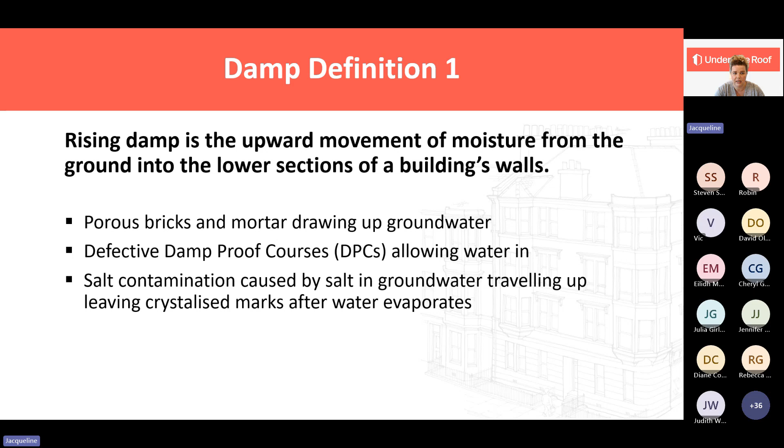It's not uncommon in ground floor flats to see salt marks on walls, and generally it does indicate that there are some other kind of issues going on below ground level that need to be dealt with, and that can cause rising damp.

Our other type of damp that we have in Scotland is penetrating damp, which is when water enters the property from the outside. Your most common causes of penetrating damp are things like roof and gutter issues. So that might be dependent on the type of roof that you've got, whether it's a flat roof, or a pitched roof with tiles, slates, whatever it may be.

It could be that there's a missing or a slipped slate, or there's issues with the lead work on your roof. Maybe your flat roof has come to the end of its life and it's started to bow. There's water pooling on it, which can obviously cause water to enter into the building. Gutter issues, we'll come on to talk about that in a wee minute. I've got some photographic examples so we can see where gutters cause people problems.

Cracked masonry is another area that can cause penetrating damp to occur in your property, particularly when, as an owner, you're just not aware of the condition of the stonework in your building. You have cracks there. When it's raining, the stone gets wet and the water just comes through and starts to cause some real problems. Cracks or just defects in windows and door surrounds can be an entry point for water that can start to cause damp. And obviously, if you've got any blocked or leaking drains, downpipes, externally or internally, then that can cause you issues with penetrating damp.

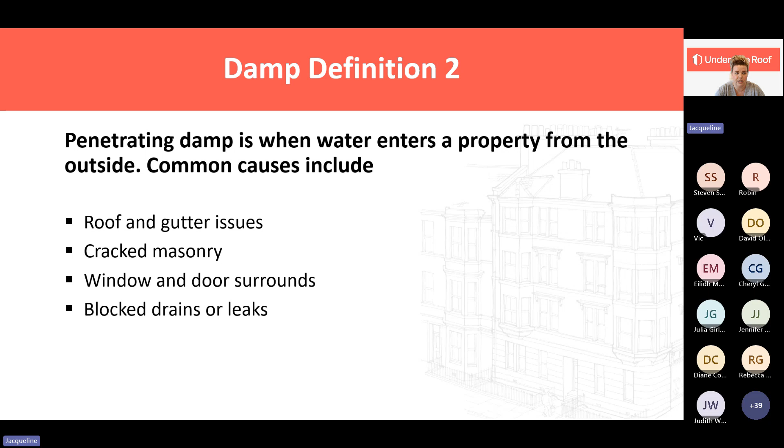Mould is a type of fungus that grows on surfaces in damp and humid conditions. We hear a lot in the news. It's been so topical for a number of years, but particularly in the last 6 to 12 months, where there's been lots of press activity across Scotland, towns, cities, smaller areas, about people who are having issues with black mould in their properties.

So typical causes of that is obviously excess water that's coming from leaking roofs, plumbing leaks, or water ingress that's coming into the property. It's got nowhere to go. It's causing damp, it's penetrating damp, and that is then turning into condensation in areas, and it's creating black mould. Poor ventilation prevents moisture from escaping in a property. It increases humidity, and that's a real breeding ground for mould to start growing.

Condensation occurs on cold surfaces. We'll come on to talk about condensation, but I think it's just important that we recognise that we've got humid air in a property and we've not got anywhere for that to go. When it does hit a cold surface, whether that's an external wall or a window or both, condensation and water droplets are going to occur. If they're not dried off, then you're going to start to get mould growth in those areas. And obviously, rising and penetrating damp can cause mould to grow as well.

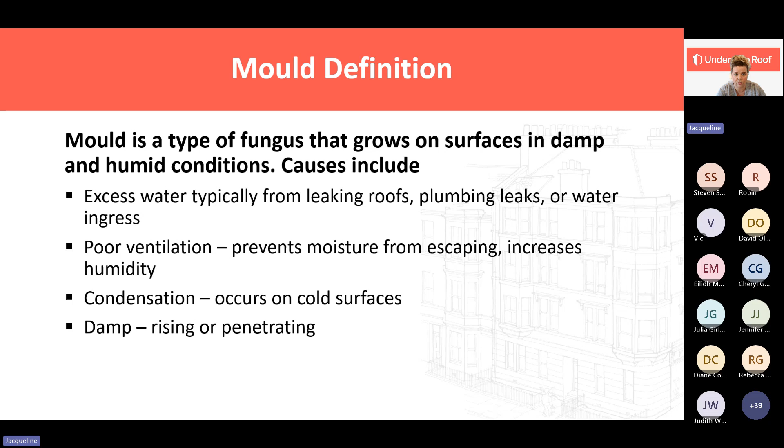So I just thought it would be useful to have a couple of photographic examples. I'm aware as landlords you're not all going to be living in the buildings where you own properties, you might have a letting agent who looks after your property or your portfolio. So you're not there on a regular basis. But I really would encourage you to visit your properties. And it's a good idea to start off with what's happening externally. Have a look at the building from the opposite side of the road, and have a look up at the gutters and see what's happening.

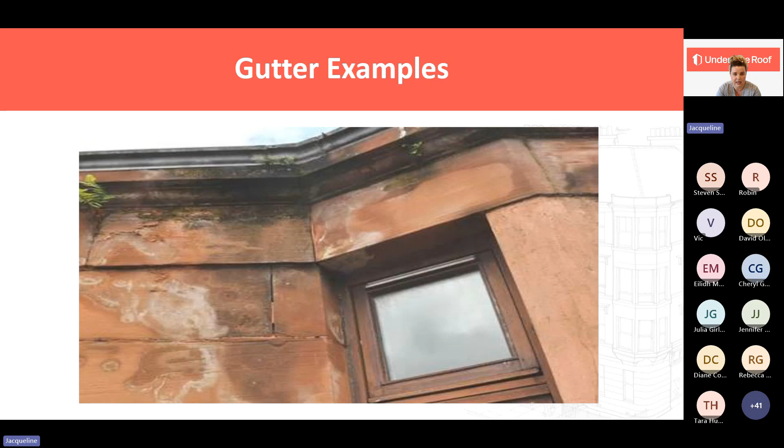We can see in the example here that we've got some foliage that's grown out of the gutters. We can see that the stone is really wet, and it's obvious that there's some kind of water leak coming from the gutters that's causing the foliage to grow and the stone to get wet. That will undoubtedly be causing issues internally. You can also see that there's some cracked masonry as well. So have a look up at your building, see what's happening. Do you see something like this?

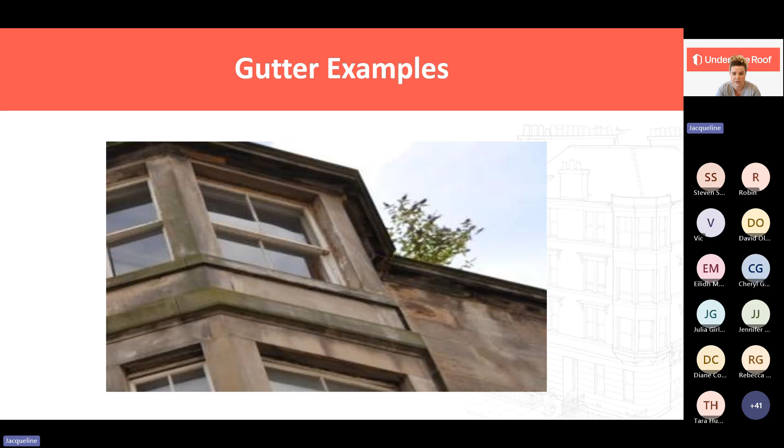Or do you regularly look out, whether it's in your own property or when you're at work, onto a tenement building, and you see this? That is undoubtedly going to cause an issue in that building, and the gutters do need to be cleaned on a regular basis. We would always recommend that they're done annually under one roof. In certain cases, it might be that they're done twice a year, but we have had examples from owners who are doing it on a quarterly basis just because of the location of their building in a leafy area, and they have regular issues with leaves blocking the gutters, and foliage growth.

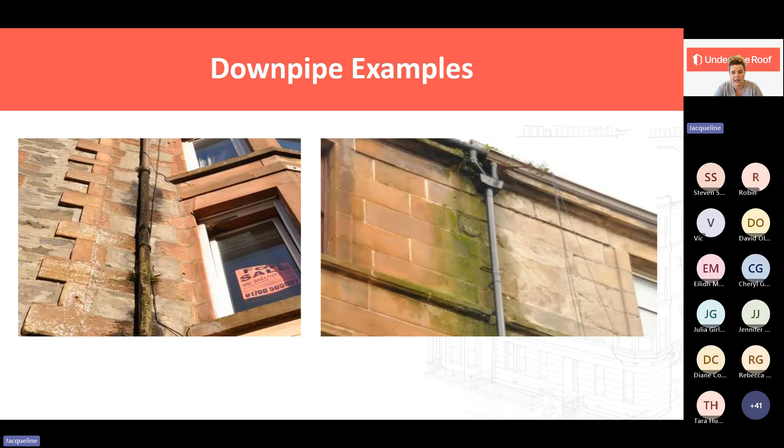We can see that there's issues there with water; rainwater is coming down the drain pipe, and leaking out and causing issues to the building. So have a wee look and see what's happening in your building next time you're round, or next time you're driving past, if it's somewhere that's local to you, just to get an idea of the condition, what's potentially going on, and how you can then start the process of speaking to the other owners and trying to figure out resolution.

So why is it important for you as a landlord, as a property owner, to maintain and look after your building? We speak about this continually at Under One Roof when we're talking to people about tenement management and maintenance. We need owners, landlords, to know specifically what your responsibilities are. Obviously, as a landlord, you've got a whole host of regulations, legislation and obligations that you have to comply with.

But don't forget that outwith you being a landlord, you're also an owner within a building, and you didn't just buy your flat, you also bought a share of the common areas, and you are responsible for the upkeep and the maintenance of those areas along with the other co-owners in the building.

We hear a lot at Under One Roof through our inquiry service that I'll come on to talk to you about later on, about difficulties that owners have contacting landlords, getting landlords to engage in the common repairs process, or just even getting them to engage in basic dialogue about the condition of the building, and issues that may be there. So I really would urge everybody that's here today to be aware of what your responsibilities are.

If you don't already have a copy of the title deeds for your property, then I would recommend that you go on to Registers of Scotland and you pay the £3.60 fee, and you download a copy of your title deed so you can check what your responsibilities are on an individual basis and in common with the other owners in your building. You need to be aware of the condition of the building.

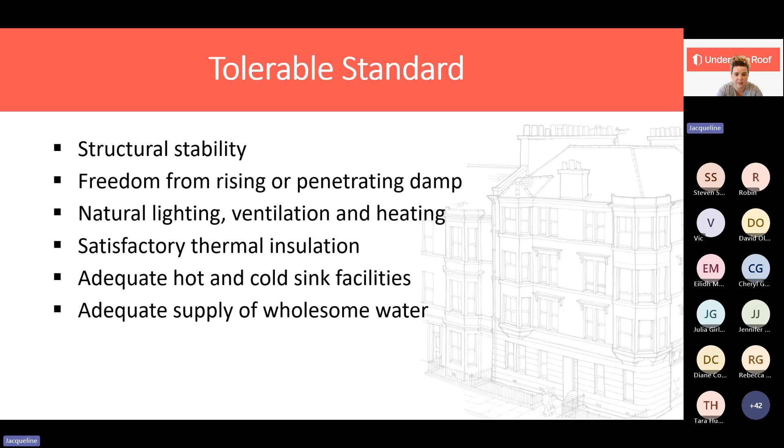It has to have natural lighting, ventilation and heating, satisfactory thermal insulation, adequate hot and cold sink facilities, adequate supply of wholesome water, sanitary conveniences within the house, satisfactory facilities for the preparation and cooking of food, effective systems for drainage and disposal of wastewater, adequate access to all external doors and outbuildings, and an adequate and safe electrical installation.

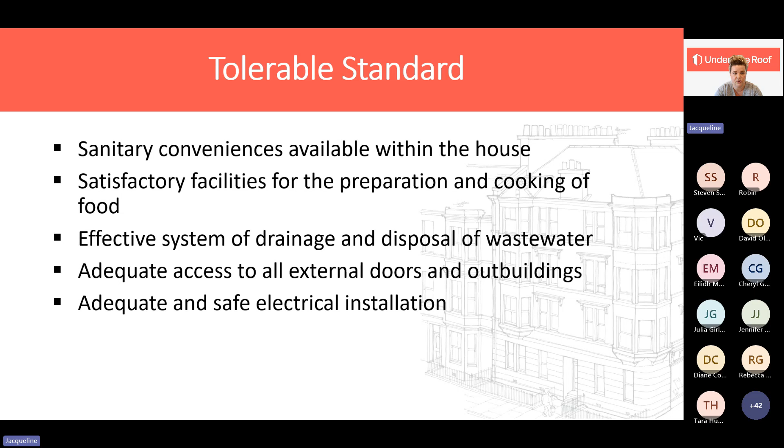So if we think about that in the context of the updated 2025 Act and where we're going with that, the Scottish Government will be outlining what their plans are within the tolerable standard for additional regulation upon landlords on how they have to deal with damp and mould in a property, what the timeframes are for that, and how we can start to move forward with updating our housing stock in Scotland. How are they going to do all of that? Well, they're going to do that through the vehicle of Awaab's law.

Awaab's law came into effect in England following the death of a toddler in 2020. He and his family lived in a social housing property that had issues with damp and black mould that caused him to develop severe health issues as a result of living in those circumstances, and he tragically didn't recover from it and lost his life.

So at Westminster, they took on Awaab's law and brought that into being, and that is what the Scottish Government is looking to do potentially from March next year. There's no update from them at this time as to the definite date, and there's certainly no update that they may not meet this date. The intention is, following the bill receiving royal assent and becoming an act in November, that from March next year the principles of Awaab's law will come into the private rented sector as well as the social housing sector in Scotland.

So what will that mean for you as a landlord? It will mean that you'll have a legal obligation to investigate and resolve complaints about damp and mould, and it means that you'll have strict timeframes to comply with in the repairs process. If we look at Awaab's Law as it stands at the moment for England, which you can go online and have a look at, you'll see that there are different categories of repairing issues.

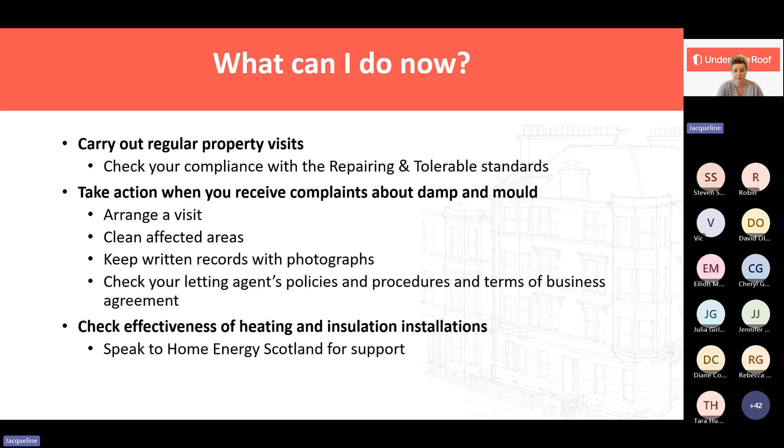So have a chat with them if you're thinking, my heating system is not that effective, it's been there for a long time, I want to explore what my options are. So speak to Home Energy Scotland. Make sure that your heating systems are regularly serviced and radiators are being bled. Make sure that your tenants have got a key to bleed radiators and instructions on how to do this.

Why are we bleeding radiators? Well, we don't want radiators to not be able to operate fully and effectively. When the heating goes on, we want the full radiator to heat up and to be at optimum performance. If it's clogged up and it's not bled, then the radiator may not come on fully, or it may not come on at all. So make sure that the tenants know what to do in those circumstances.

Or it might be that when you go round, when you're checking your compliance with the repairing standard and doing that visit, you take a key with you to bleed the radiators, and you just say to the tenants, make sure that the heating's off when I come round so that I can bleed the radiators. Provide tenants with a copy of any safety check certificates and service paperwork that you've got.

Even if your letting agent is carrying that out, make sure that your letting agent is giving the tenants a copy of it, as well as yourselves, just so that people know that all the safety checks are up to date for the property. Have a look at the ventilation within your property. Make sure that all your windows open properly.

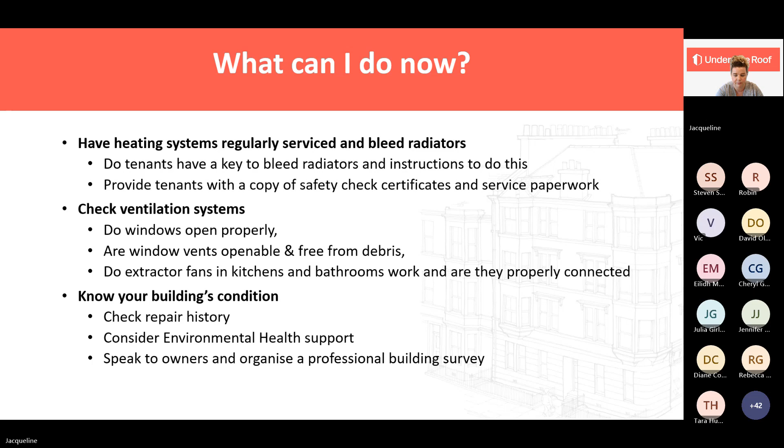So what are our top tips for tenement owners when it comes to just generally being an owner and being a landlord in a property, whether you've got issues with damp and mold or not? We want you to know who all of the owners are in a building. So get to know the owners. Make an effort to find out who they are, get their contact details, and make sure that that's circulated amongst all owners so they know how to get in touch with you, particularly as landlords.

And if you're working with a letting agent and you want the communication to go through the letting agent, then make sure that people know how they get in touch with you. You know, we're not anonymous. We've got to work together with owners. And as we move forward with this legislative update and Awaab's Law coming into effect in Scotland, a lot of the issues that we have seen in properties and that we're going to see in properties are not just all attributed to tenants' lifestyles.

We know that our housing stock is in poor condition in Scotland. We know that that is contributing to water ingress, which in turn is going to create damp, and mold is going to develop, and we need to be able to move forward to start repair work. So the first step for that is knowing who the other owners are and being in touch with each other.

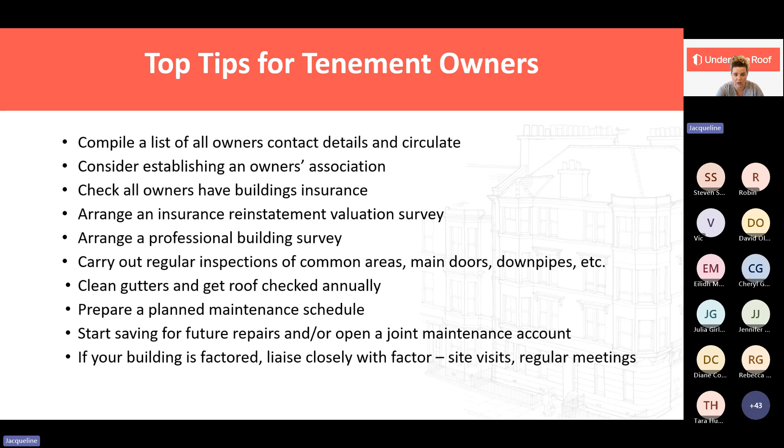Our website contains hundreds of informative articles on all aspects of tenement management and maintenance and retrofit. Our website came from the original tenement handbook that was written by our founders, John Gilbert and Annie Flint, in the mid-90s, and it's been updated as things have changed in the legislative and regulatory framework. But we've got lots and lots of architect drawings that John Gilbert did that are on our website, that really break down the technical aspects of repairs to roofs, to gutters. There's so many pages on gutters with different types of gutters that you can have.

We've got extensive information on drain pipes, about what's happening below ground level, about wet rot, dry rot, etc. Anything that could be causing issues where damp and mold can develop in a property, we are guaranteed to have some kind of article on it, and be able to steer you in the right direction.